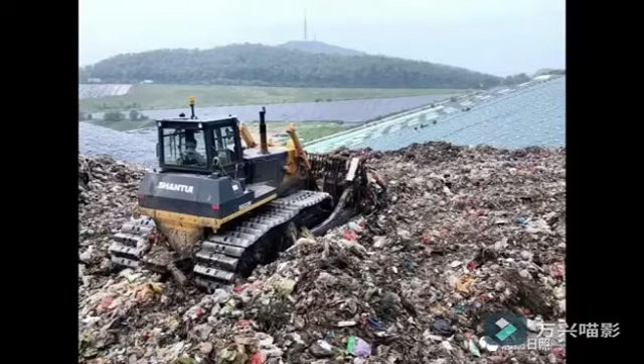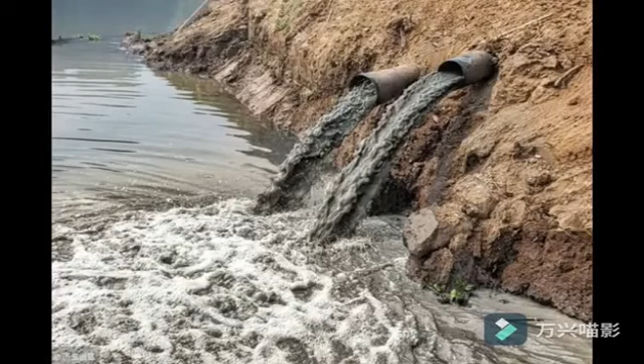Excessive use of fertilizers and pesticides and leakage from landfills leads to land and soil damage. Trash dumping and disposal of large amounts of industrial waste into rivers, lakes, and oceans all leads to water damage. This kind of environmental degradation can lead to extreme harm to the whole world, such as illness and extinction of plants and animal species.

That's why we created Explorer 1, an amphibious robot which can operate both on land and water surface. Explorer 1's major function is to sample and test water, soil, and gas in order to measure and prevent environmental damage and increase the lifespan of our natural resources.

There are 4 factors which make Explorer 1 unique and successful in the market. First, services of the environmental industry have very high potential. According to research made by the International Trade Center, environmental services account for almost 50% of the total market, and the demand for environmental services is still increasing. Thus, the need for a service such as Explorer 1 is also maintaining a rising trend.

Second, Explorer 1 has great ability of obstacle surmounting, and its small dimensions allow it to enter narrow environments without threatening local animals. Third, Explorer 1 is able to release investigators from dangerous jobs.

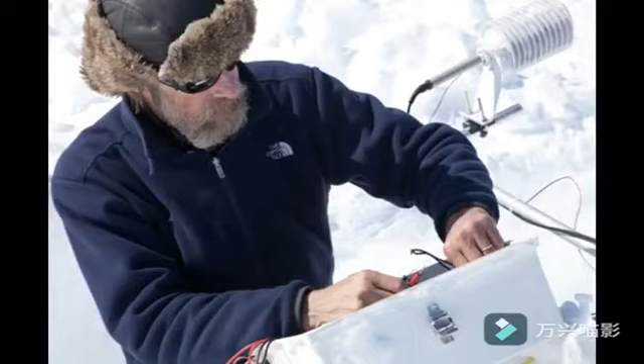For example, Konrad Steffen, an Arctic scientist who did research about climate change in Greenland for 30 years, fell into a crevasse in the ice accidentally and drowned in the deep ocean below. Scientists who die because of doing research, this happens every year. If they can use Explorer to study instead, this kind of tragedy can be avoided.

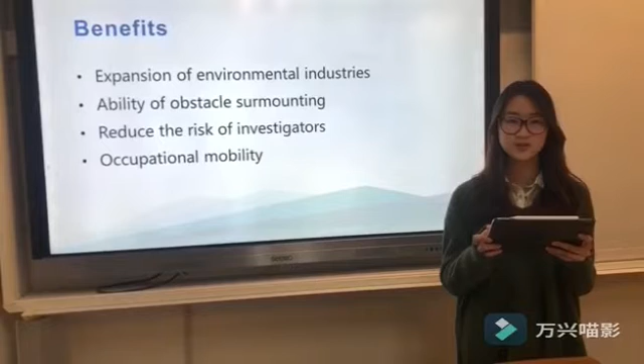Last but not least, the occupational mobility of Explorer is high, which means the tasks that Explorer can do are not limited only to the environmental industry. It can serve a variety of functions by equipping different facilities and attachments. Therefore, the function of Explorer 1 can be customized according to different needs of our consumers.

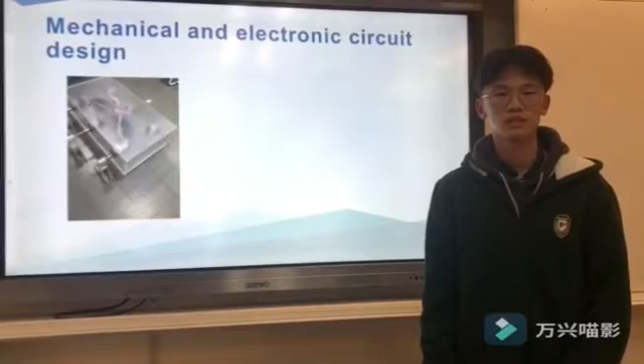Mechanical and electronic circuit design. The first picture we can see is the transparent and small cuboid. The advantage is that it is quite light, which can reduce the weight and enable it to move more flexibly. The cuboid contains electrical components that are necessary for the operation. The object also has a large volume of water displaced. This can help it float on the ocean and finish the task successfully.

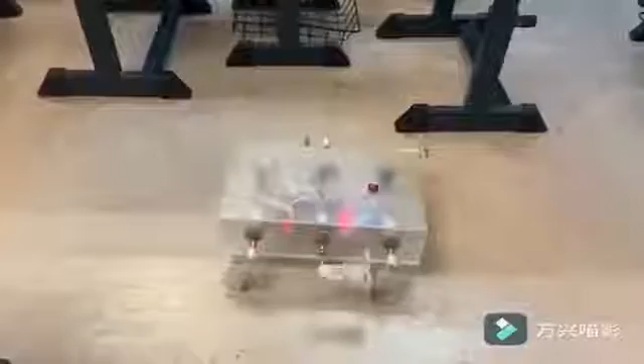The second picture is the motion equipment we use. The circular arc structure improves its weight capacity, which means it can take more equipment at the same time. Compared with robots moving by feet, our robot can move with a higher velocity, while compared with those moving by circular wheels, we can better cross obstacles.

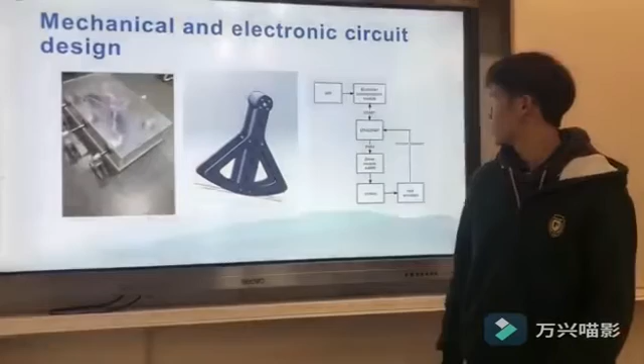The last one is our control flowchart. The one in the middle, STM32F407, is the single-chip microcomputer, and the Hall encoders here can send out signals, and then the single-chip microcomputer can get the feedback from it. So at this time, the PID algorithm can play a role in it.

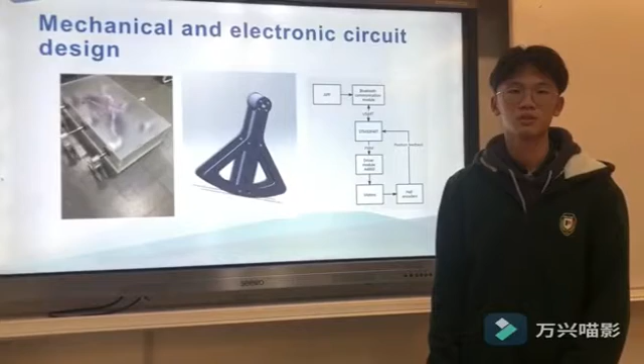The PID algorithm consists of 3 terms: proportion, integral, and differential. The independent variable k of this function is the model's current value of angular position, and the dependent variable is a new angular velocity. The function error(k) is defined to represent the difference between the current angular position and the target value. Kp is a constant between 0 and 1.

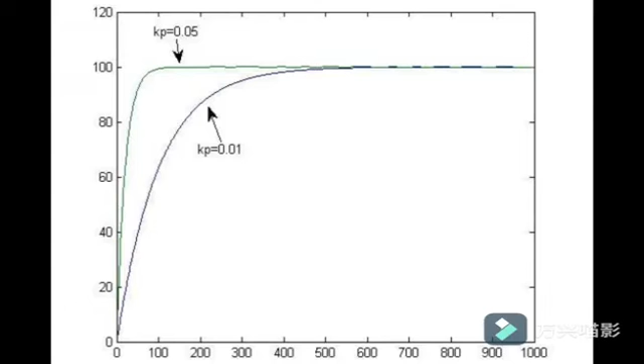The role of this term is to reduce the angular velocity of the model as it rotates and approaches the target value. When the difference is eliminated, the value of this term will fall to 0. If overshoot takes place accidentally, the value of error(k) will become negative, and thus the direction of the angular velocity will change to make the angular position meet the target value again.

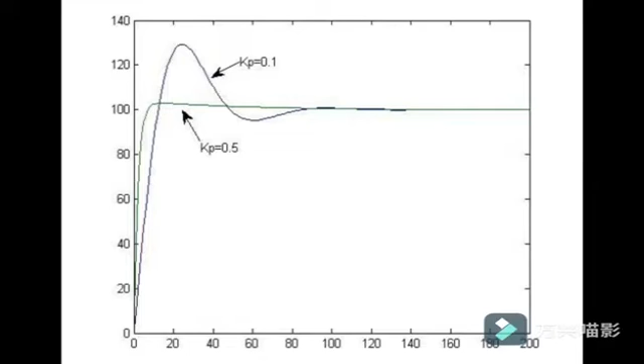The function of the second term is to accumulate the value of error(k) and reduce the steady state error, which is caused by inertia and friction. The role of the third term is to reduce the change of velocity to prevent overshoot. The coefficients of the last two terms are zero in the program of Explorer 1, since, according to experiment, the first term can maximize the accuracy and efficiency solely.

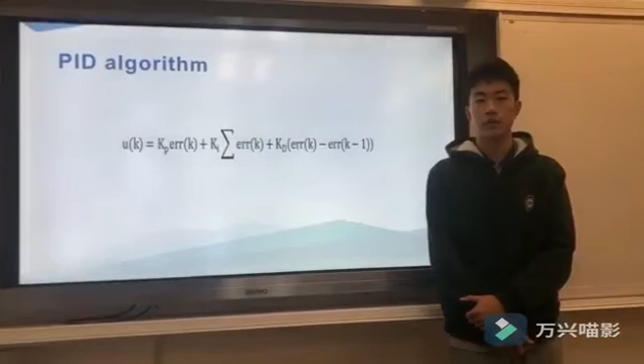We separate the funding resources partly into three sections: venture capital, government support, and private investment. For venture capital, what venture capitalists will do is look at our project proposal and make their own evaluation. They see how much our project is worth, and they will give us an initial fund, while at the same time involving a fair amount of loss and profit.

For the government supporting part, there are two paths to get help, but we only talk about the first one because the second is not very usual. We think our project has the characteristic of energy conservation, and at the same time we can also protect the environment, which is why we're worth the funding from government.

Last but not least, private investment: except for those usual ways like asking our friends and family members whether they are interested in our project, we'll also issue some leaflets in our community to see whether they are willing to give us a hand.

For the cost part, out of several cost estimation methods, we choose the 3-point estimation because it tends to be the easiest one within our bounds of knowledge. Literally, 3-point estimation means making estimations through three values: the optimistic, the pessimistic, and the most possible value. They represent the best situation, the worst situation, and the normal situation respectively.

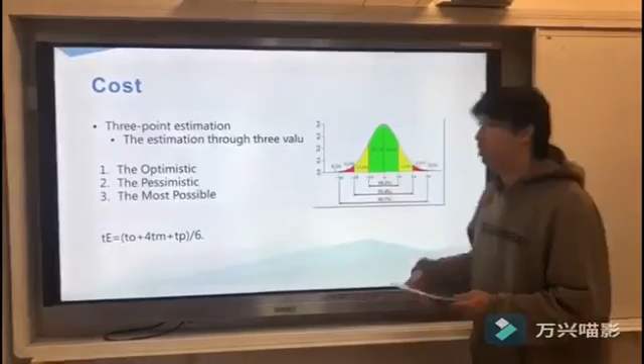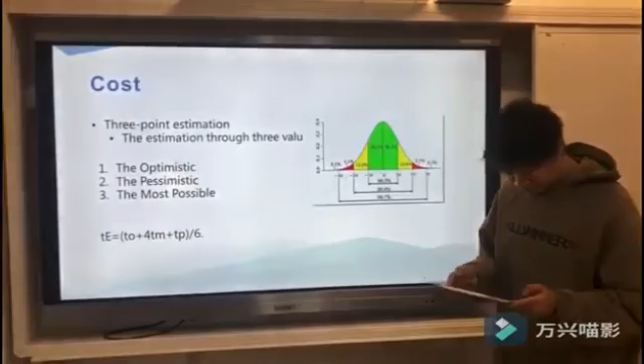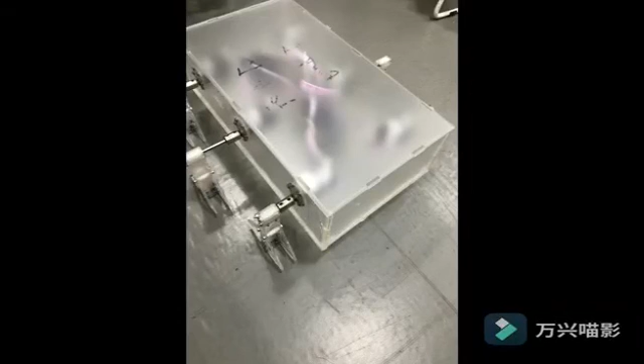In conclusion, we expect that Explorer 1 will become successful. Thank you for listening.